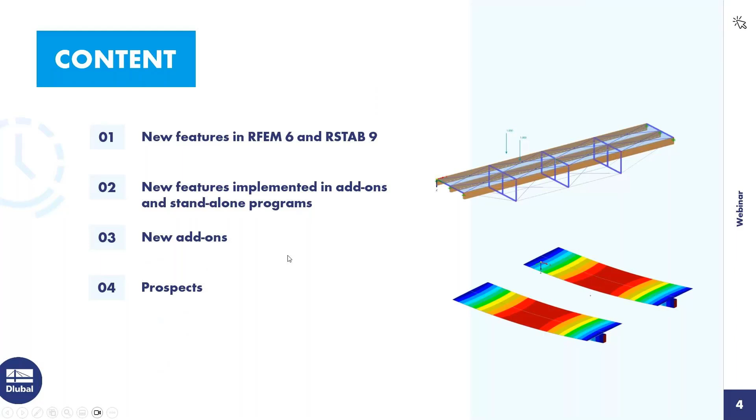For today's agenda: first we will present features in the main programs. That's a PowerPoint presentation, but we will also turn into the program and show some features directly in RFEM 6. Then we present the new features in the add-ons and standalone programs, present new add-ons, and as I already said, take a look into the future plannings for our developments.

Okay, let's start with the first features. The first feature is the console with Python option. You can also do in-app scripting with the Python language, additionally to JavaScript. Then you can implement visual objects in your model, maybe for a presentation, to show the dimensions of your model when you insert people or cars or something like that.

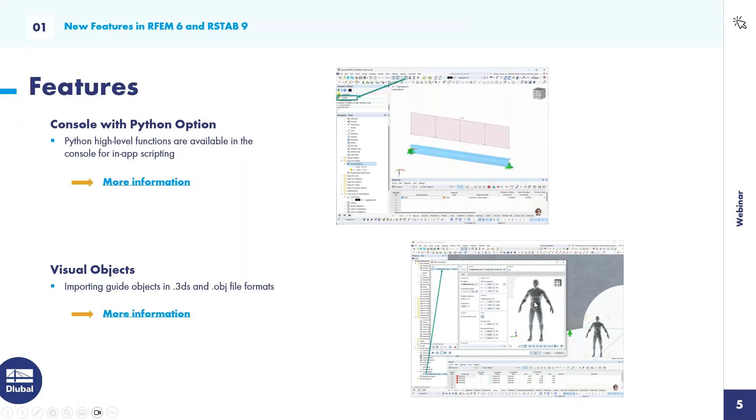The next feature is, in my eyes, quite important: the line hinges for rigid links. The absolutely biggest advantage is that you can model your elements in their actual position, for example for the connection of a ceiling joist. I will show that in the program, in combination with the interactive comment that you can hide if you want. You can create such internal or interactive comments with only a few clicks, and add additional information. I will show that in the program.

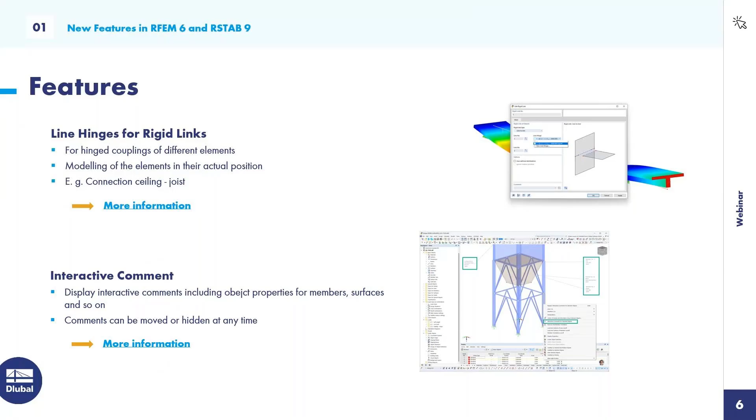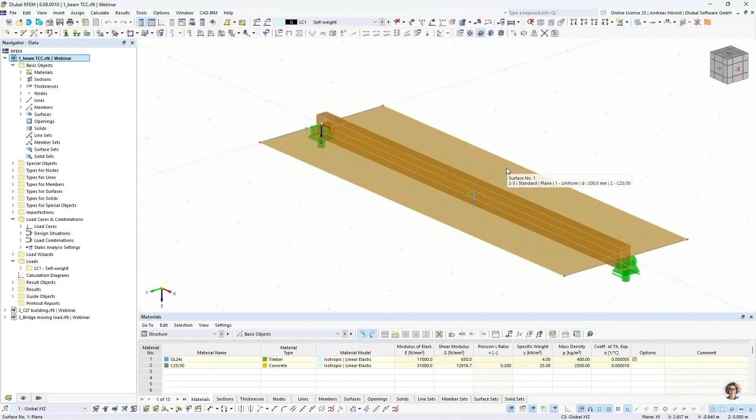That's the model that I have prepared. We would like to create a composite beam made of a timber beam and a concrete slab. But first, let me switch off the loads and create an interactive comment. I select the objects for which I would like to add an interactive comment, then right click, interactive comments for selected objects. Now you can see them here in the middle, but I can move them easily by drag and drop, so we can modify it a little bit.

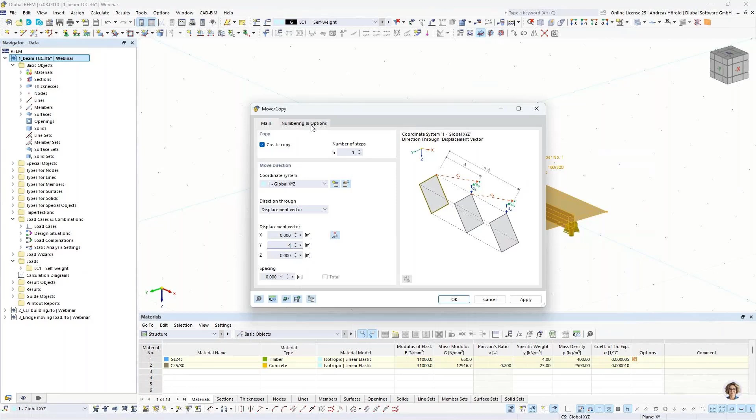I can also double click on such a comment and add several additional pieces of information, for example area. Now you can see the area of the concrete slab. Then let me copy that model: move copy, selected objects, copy 4 meters in Y direction and including loading.

In the first step, I would like to show you, when you switch in the navigator data, that function that is not new: line releases. We would like to create a composite beam with line releases, and in the second step, with the rigid links and line hinges.

Okay, then you can see the information of the beam and the slab. The beam has a height of 300 millimeters and the concrete slab 200 millimeters. Half of both is 25 centimeters, and we have to create a surface eccentricity of 25 centimeters.

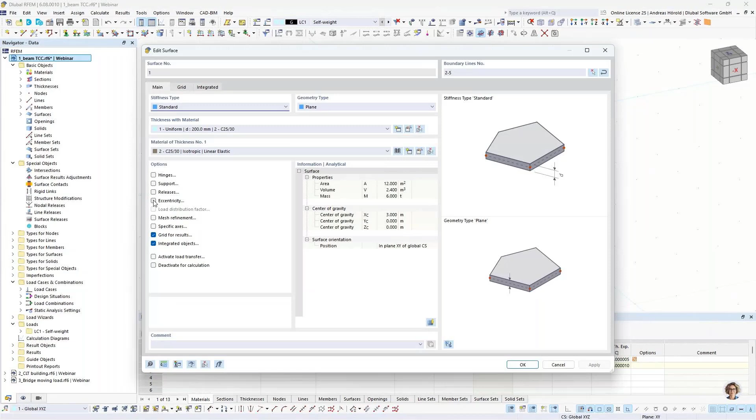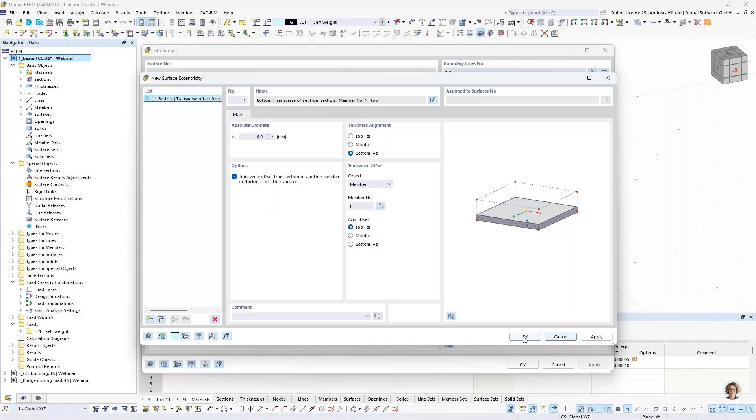Let me do that: double click on the surface, then select eccentricity, and I have to create a new surface eccentricity. We could enter 25 centimeters or 250 millimeters here, but I would like to show you another option, the automatic eccentricity. I would like to set the alignment: the bottom of the plate should be on the top of the beam. Which beam? That beam. And now the surface is moved automatically in that direction.

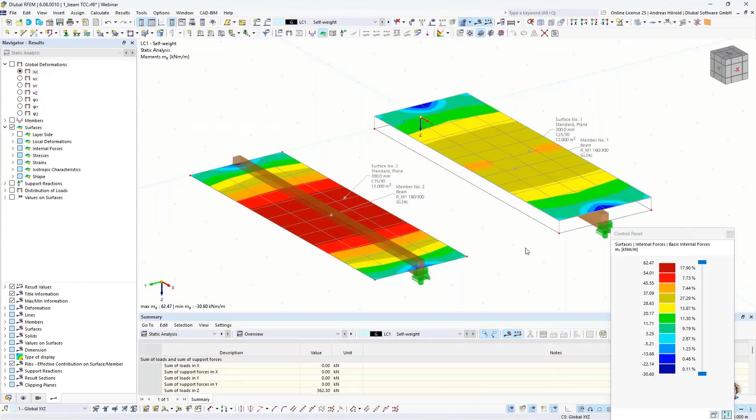Okay, all is connected, and when I calculate all, you can see the results. We now have a composite beam with a rigid connection. You can see that when I select global deformations, I have a much higher deformation on the left side than on the composite beam. In the second step, I would like to model that the concrete slab lies loosely on the top of the beam.

How to do that? As I already mentioned, we use the line releases. In the navigator data, I do a right click, new line release.

Which line? That's the center line of the beam. And the surface, that surface should be released. I have to create a line release type, so I enter a very small spring constant for the X direction, that's the direction of the line. And press OK.

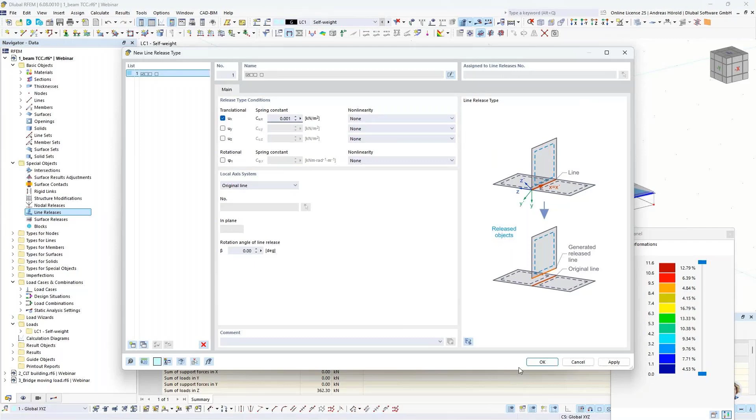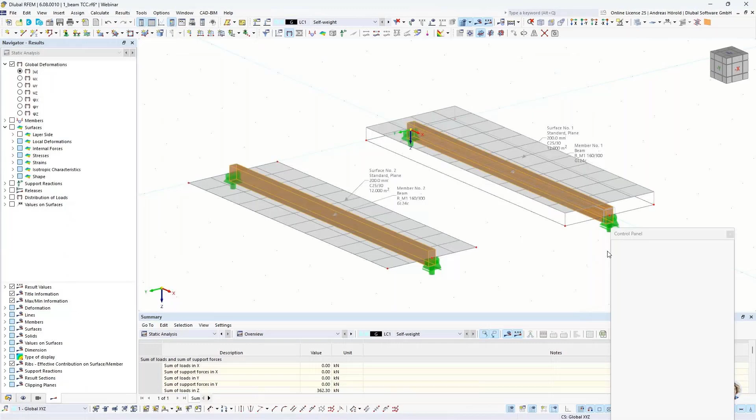Now the connection is not rigid anymore, but it's free. We can calculate and we should get the same information, the same deformation on both sides. Let's wait on the results. You can see 11.3 millimeters is the deformation for both models.

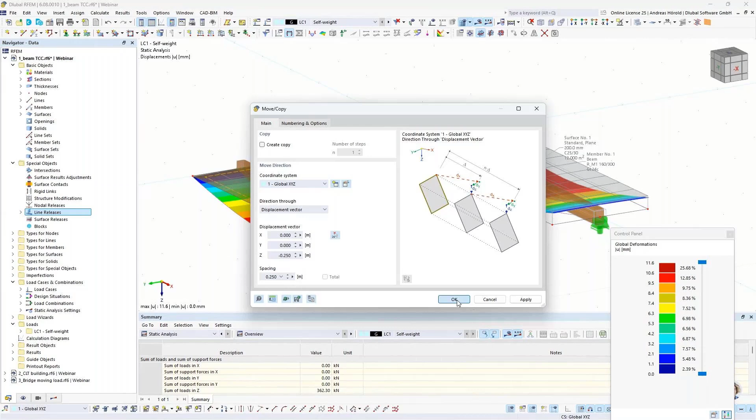So that's the version that you could create also before this year. And now we create, we use the option that's now available, the rigid links. So at first I move the surface to the actual place. I select it, then press move and copy, no copy, and minus 25 centimeters. Now the surface lies here and nothing is connected.

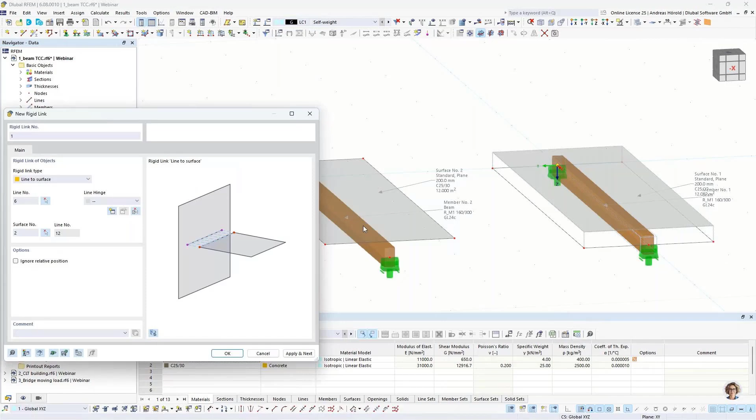But we create a connection now with a rigid link. With a right click in the navigator data, new rigid link. I select the rigid link type line to surface. I select the center line of the beam and the surface. And the line number 12 is created automatically in the surface. When we unselect that and press OK, then it would be a composite beam with a rigid connection between the two components.

Yeah, we skipped that step, and we create a new line hinge with the same spring constant in the X direction. OK. And when I calculate all, we will get the same deformation for both models.

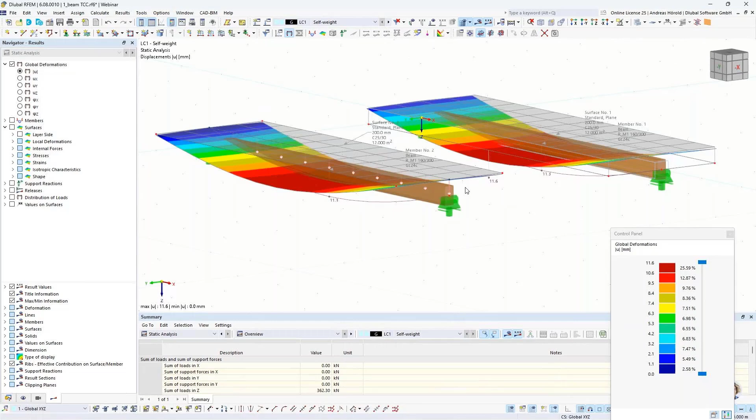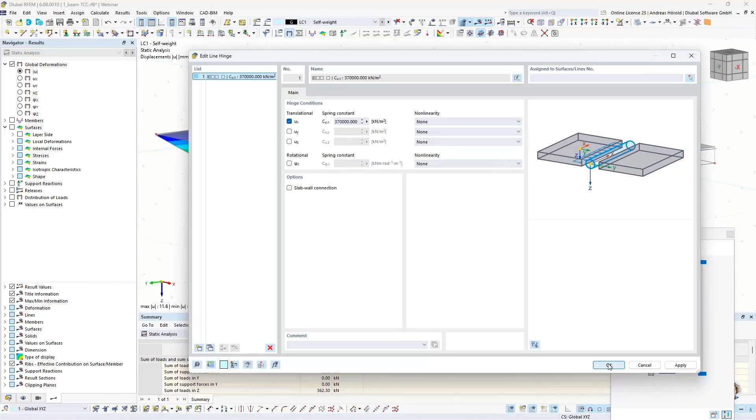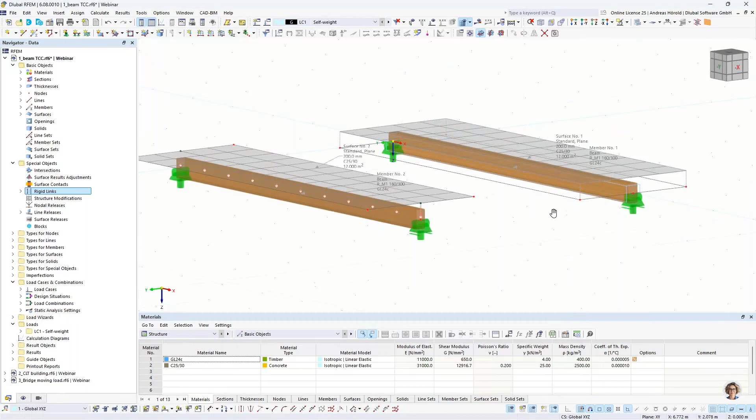Now the concrete slabs lie loosely on the timber beams. We enter in the last step the usual spring constant. I double click on the rigid link line hinge and enter a value that's more typical for a TCC screw, 370,000. We have to do the same for the line release, 370,000. And we should get the same deformation for both components, or both models.

7.6 millimeters. As I already said, the big advantage of that model on the left side is that you can model all components in the exact place where they are in reality. OK, that's all for that model and these features.

Then you can now generate surfaces from member with section cross sections, when you would like to intersect or generate surfaces from such a section cross section, for example for stability analysis or connection design or something like that. You can do that now.

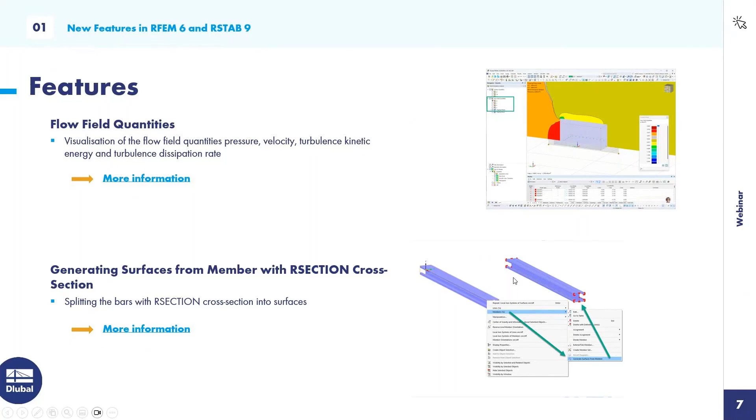You can display the finite strip method results with a 3D graphic.

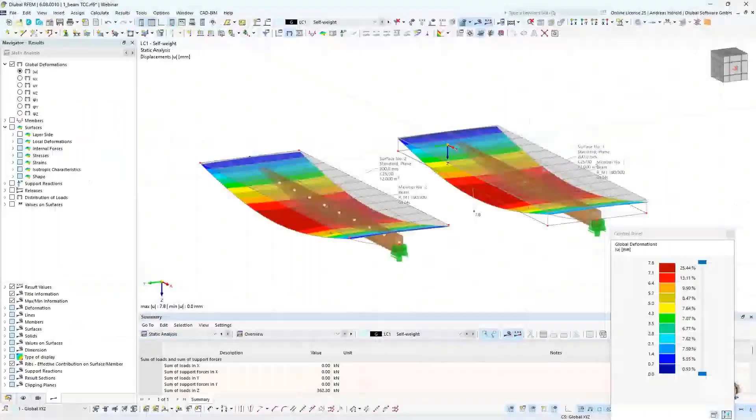Then, also an often wished feature, the independent FE mesh. I would like to show that in the program so you can understand it very well. So, that's a CLT building. It stands on top of a slab, a floor slab made of concrete, and the slab lies on soil solid. So let me go to the FE mesh settings.

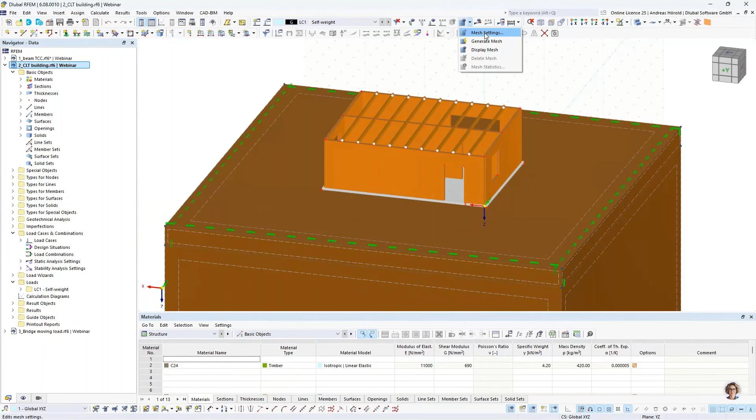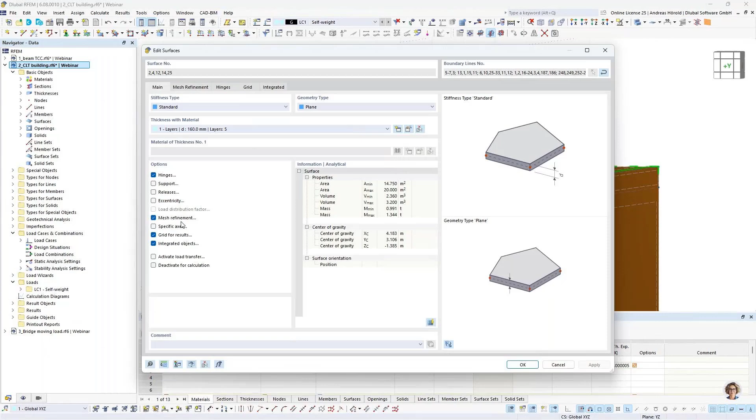We can leave the standard value of 50 centimeters for the FE mesh elements. For solids, we changed that to 1 meter. And I would like to have an FE mesh with a size of 25 centimeters for the CLT slabs. So I select all, then I create a mesh refinement, new mesh refinement, 25 centimeters. So let's create the FE mesh. Sorry, so display mesh, OK.

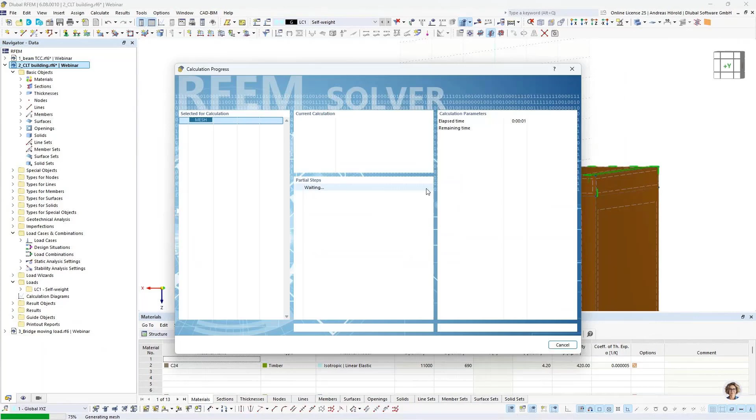And you can see in the concrete slab, the FE mesh, it's not regular. All FE nodes are connected to the neighbor element.

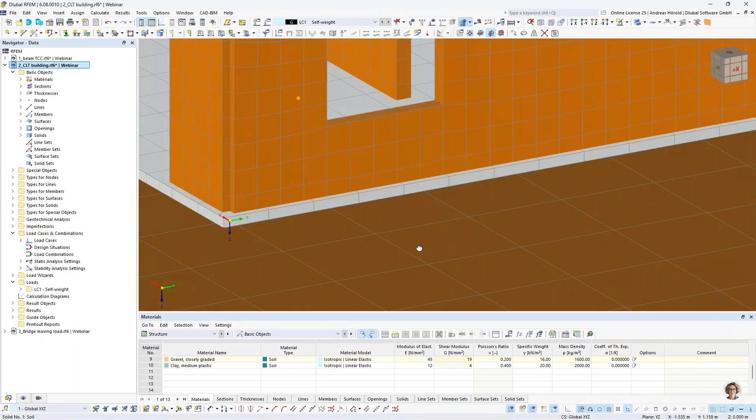So when we go back to the mesh settings, you can now select the independent mesh. OK, and apply, and you will see the difference. So it's much better now. As you can see, the finite elements do not have to touch at a common node, and the finite elements of integrated objects are connected to the integrating one. Quite a good option for FE calculations with different FE mesh settings of the elements.

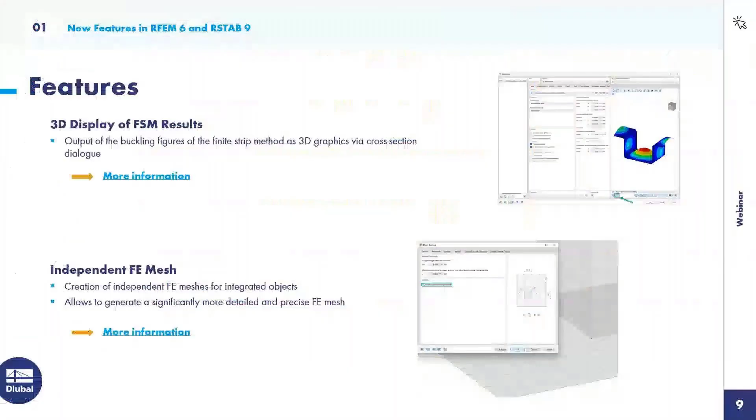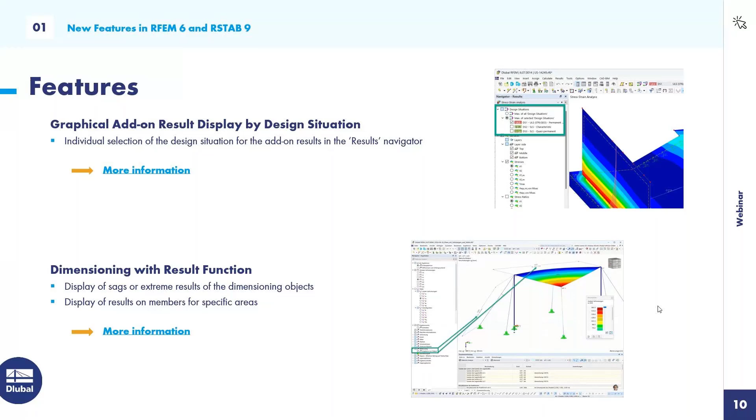The next feature is the spline surface with minimal curvature. It's very helpful for generating curved surfaces based on control nodes in the middle of the surface. It's especially useful for modeling terrain surfaces or other complex curved geometries.

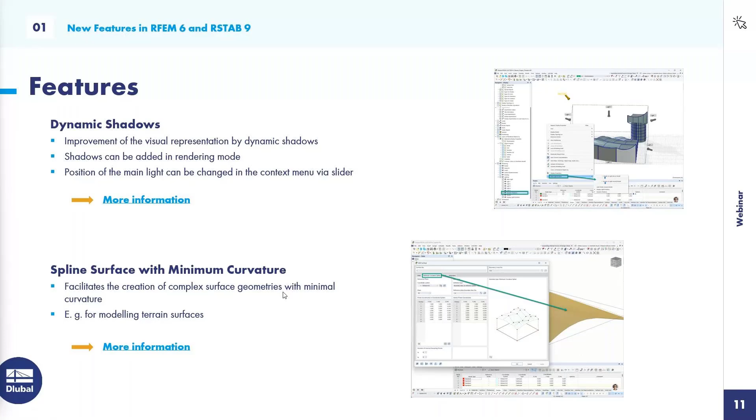Next, I'd like to introduce you to our AI assistant, Mia. The AI was trained with the help of our website and ChatGPT and was honored with the Construction Computing Award 2024. I'd now like to show you Mia in the program, but she's also available on the Dlubal website.

Now I switch to RFEM. As you can see, you have this little button in the corner, and when you click, there is the AI assistant, and she can answer questions about products, add-ons, as well as licensing, but also technical questions and questions about support and training.

For example, we can ask her, how do line releases work in RFEM6? And then Mia gives you a definition and a step-by-step guide how this works in RFEM.

And she also links articles on the Dlubal website. If you want to follow the link, you have to press the control button, and then you can see the article on our website. For example, here is the knowledge base article for the line releases in RFEM 6.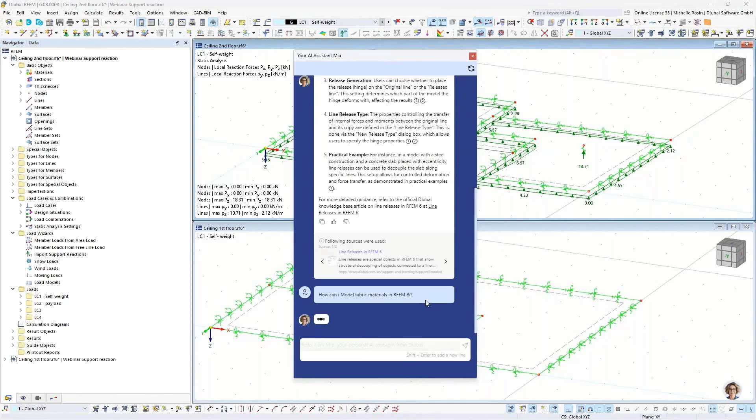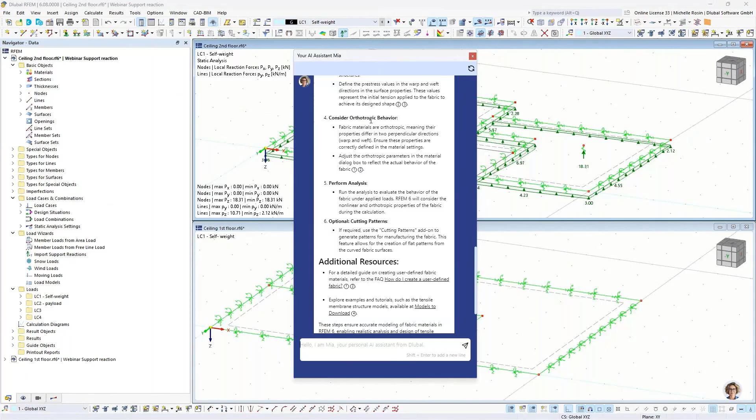We can ask her another question, and it's the same procedure. When she's ready, you can also see that she marked the sources on every step she made, and you can see the sources at the end of Mia's text.

So I go back to the PowerPoint presentation and continue with the next feature, which is a new member type. The damper is now available. Its member type is similar to the Kelvin-Voigt model, which consists of a damping element and an elastic spring connected in parallel. This member type can be used for models that should be analyzed dynamically.

The next feature is creating surface cells due to openings. It helps to generate lines created by openings in surfaces and thus saves time during modeling. This is very useful for the construction of timber panel walls, as the lines for the columns can be generated automatically.

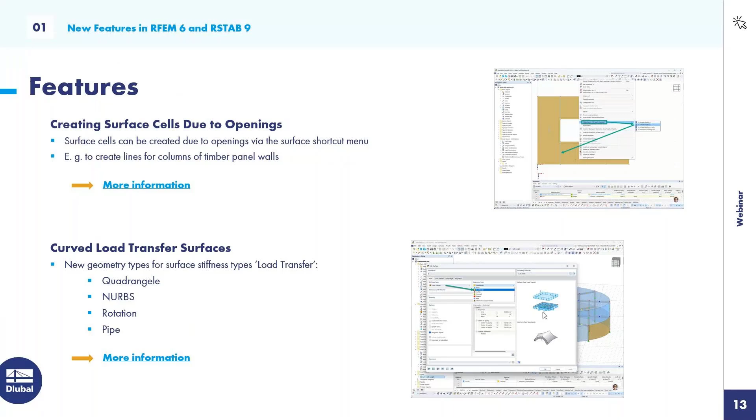The load transfer surfaces was an often requested feature for RFEM6. That means the surfaces are only used for load transfer and have no stiffnesses. Now there are also curved geometries available.

The next feature is the diagram evaluation for surface result points. This feature is useful for analyzing specific points on surfaces and analyzing the results in a graphical form.

Furthermore, another frequently requested feature is available now: displaying design results in a table by design situation. As you can see here in the picture, this enables a more detailed evaluation of the results.

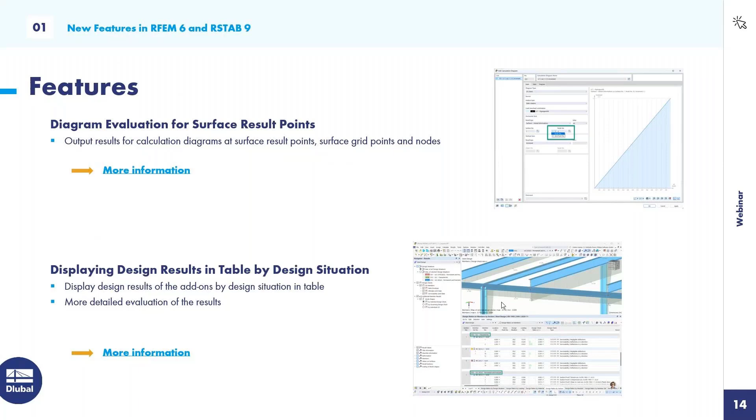The next feature is design check details on mesh node selection in the graphics. It's very helpful for obtaining detailed results for specific mesh nodes in the graphic, and as you can see here, you can also select the nodes directly in the graphic.

Another feature I'd like to show you in the program is the transfer of support reactions to free loads. So I switch to RFEM again. The support reaction transfer function enables the efficient and error-free transfer of loads.

The support forces of the connected models are applied as free loads in this scenario, and this saves time because you don't need to assign the loads manually. As you can see in the upper model, we have two ceilings here in the first floor and the second floor, and you can see the support reactions here.

The question is how we can transfer the loads from the upper floor to the first floor. We can do this by clicking in the model below, and we have the load wizard, called import support reactions.

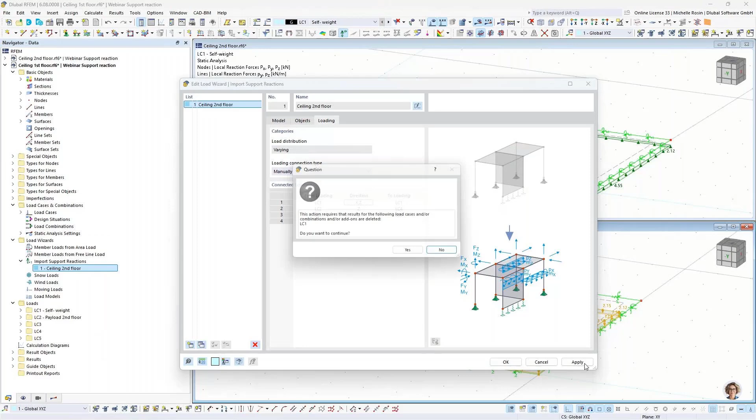Now there is a question: what happens when we change something in the upper model? For example, when we add loads in the X direction or something. So we can go back to the load wizards and click on this again, and add another direction, apply. Then it tells me that the results will be deleted. Click yes, and we can start the calculation again.

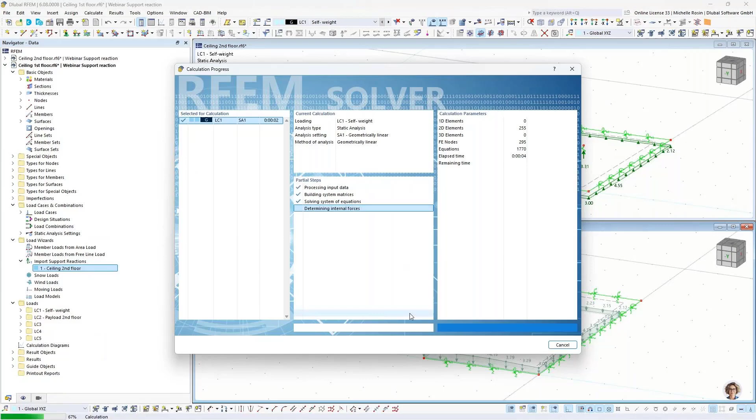Okay, so we don't have any loads in the X direction here, but you can see that always two directions are considered.

It's also possible to disconnect the models afterwards. So you right click on the import support reactions, then you can disconnect generated loads and disconnect dependent model. Yes, and the loads are still here. You can see that the forces are black now, and these ones are red because there are no forces.

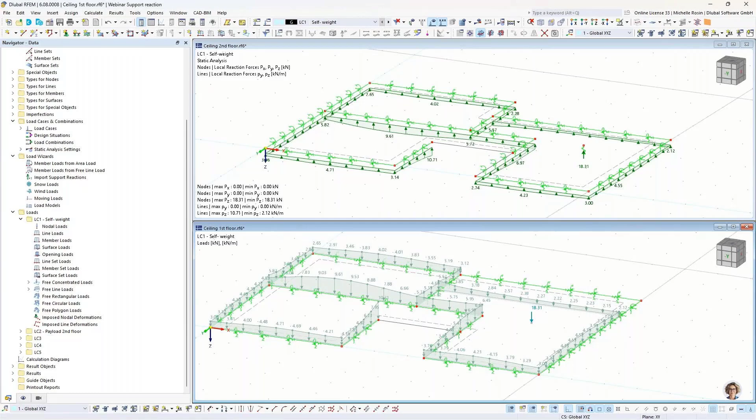Yes. And that's it for this feature. I'm switching back to my PowerPoint presentation, and I'm continuing with the next feature.

It's the final result combination via auxiliary combinations. This is very useful for creating clearer and easier to check result combinations for models with many loads or with many load cases, for example, moving loads on bridges.

And the next feature is the combined PDF report. It allows the various printout reports to be exported in a single PDF file, which makes the documentation of larger projects clearer and easier. And now I'd like to hand over to Andreas again, who will introduce you to further features.

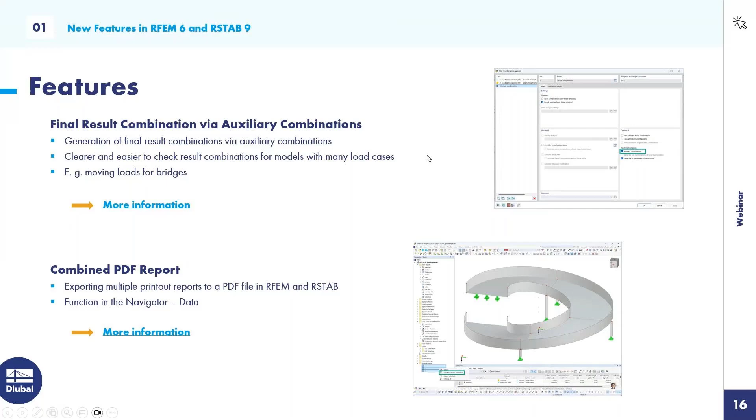Okay, I continue. You can now exclude objects from design by combination. That allows you to design certain objects only with certain load combinations.

Then join line or join member. Imagine you have two members and you would like to create one member from it - that's what that feature is for. Just select them and use that function, and you will join the members, and then there's only a node in the middle. In that example here, node on member.

Okay, then you can import and export Python scripts. Then a quite important new feature is the load wizard for moving loads. It's directly integrated in the program. In RFEM 5, you had to buy an add-on, but that's not necessary in RFEM 6 - it's directly integrated. And I would like to show that feature in the program again.

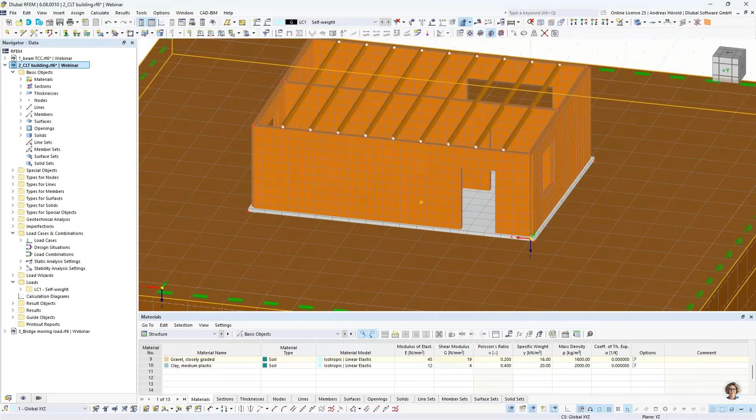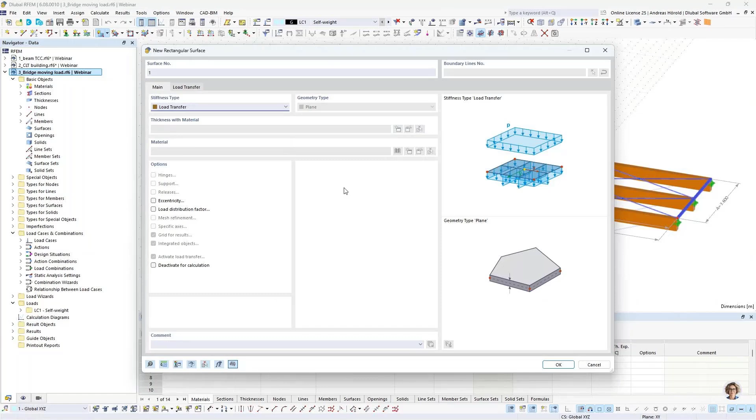So I prepared that bridge, and we would like to create a moving load. At first, that's a model only made of members, and we have to create a surface. So left above, new rectangular surface, and I would like to create a load transfer surface without any stiffness, so we use that only for distributing the load. We would like to distribute the load in that direction from timber beam to timber beam.

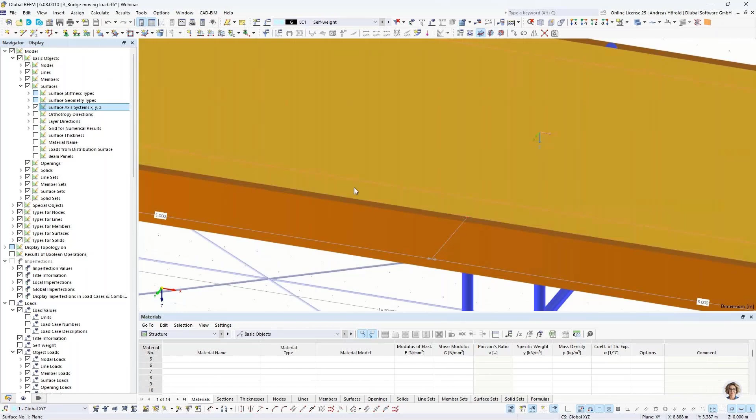Let me switch to the navigator display, to the surfaces and surface axis system. So, you can see in that direction, in Y direction, we would like to distribute the load. Okay, I double click on the surface, go to load transfer, and I select for the load transfer direction Y stripes. Okay.

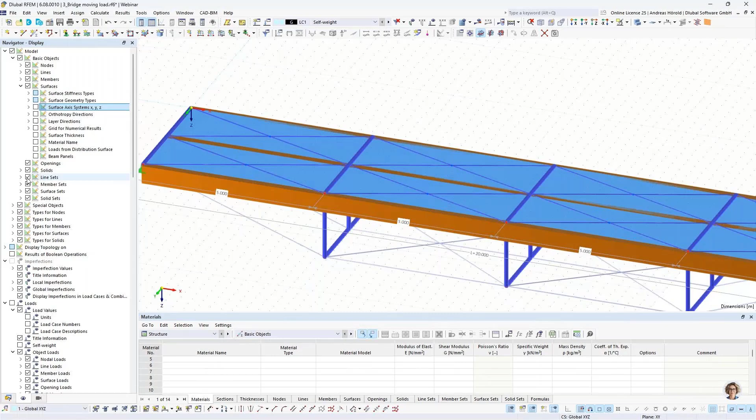So then let me display only the lines. I deselect the members. Okay, and I switch to the wireframe model, and you can see only the lines. And I would like to show you for the lines, the line axis systems.

On that middle line in X direction, I would like to create a moving load, but not on that line, but next to the line, on the left side and the right side. Now imagine a pair, two people would like to move over the bridge.

So I go to Insert, then Load Wizards, Moving Load Wizard. So at first I have to select the surface - that's the load transfer surface.

And I have to create a line set, because the moving load will move not only over one line or along one line, but along all 4 lines here. Okay.

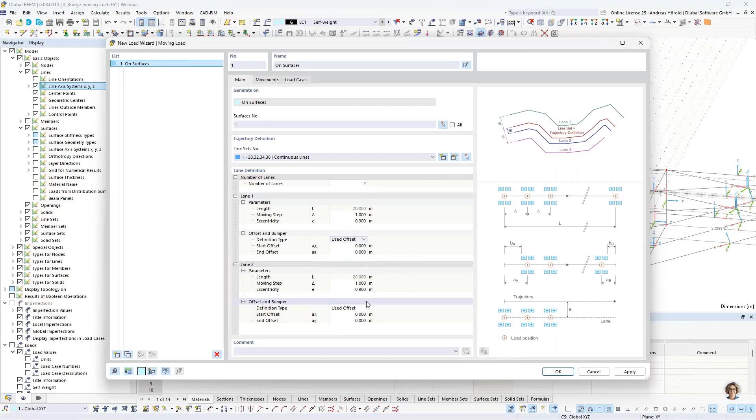So then I create 2 lanes. Yeah, and you can select more than 2 lanes, but for my easy example, it's sufficient. So the eccentricity of lane 1 is 90 centimeters, and for lane 2 as well, minus 90 centimeters. Yeah, you can also create an offset or a bumper - not in that example, but when you would like to use it, you can do it.

Then we have to create the lane definition, lane 1, and we have to create a new load model.

So number of components, in our case 1, but as you can see in the preview image, you can use more than 1 components. Then load type, force or moment—we use force in Z direction, but you can apply the load in different directions.

The type of load, there are a lot of loads available, for example free rectangular loads—imagine a tire of a car or something like that. We use the free concentrated load, and we select the main load of 1 kilonewton.

We can select the load factor and a distance from previous load and so on, but in our easy example we don't do that. So those are the 2 loads on the 2 lanes.

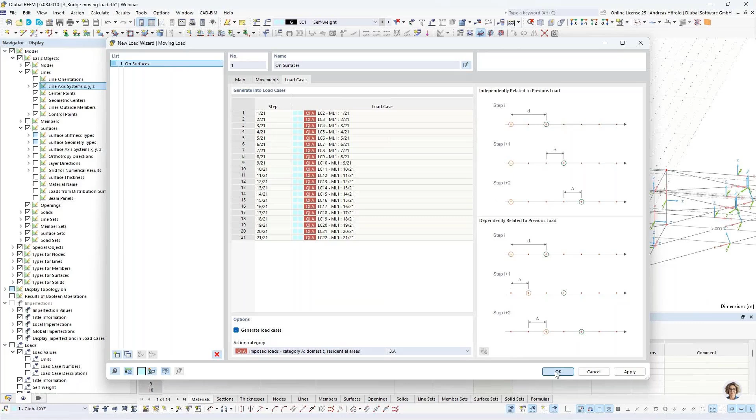Okay, and now we let the load move over the bridge. I deselect the line axis system, then I switch on the members. So now those are this. I increase the load a little bit.

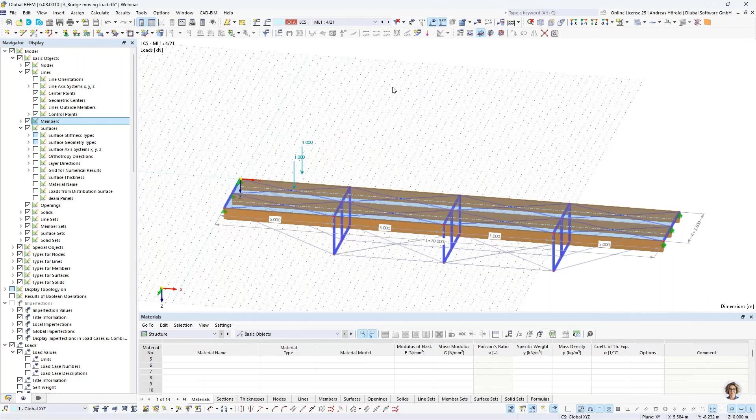And we move the load over the bridge, or the 2 loads. A nice tool for moving loads, for traffic loads, and so on. And it's for free in RFEM 6.

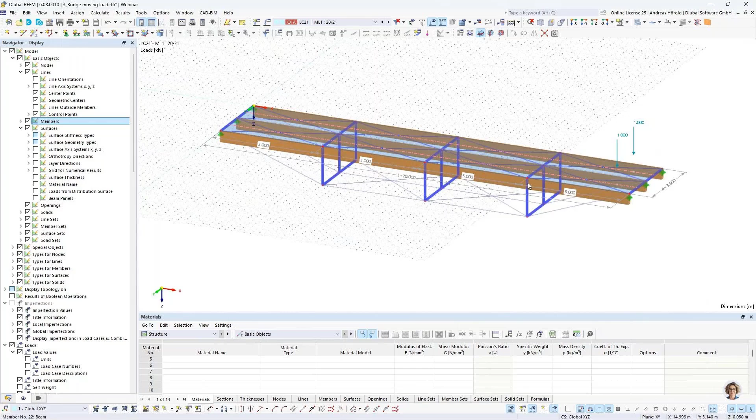Then we integrated new interfaces to BricsCAD, SDNF, or the DXF-II import and export. With that interface, you can, for example, export deformed FE mesh and other things.

Then a new feature is the hinge diagram. You can use that for pushover analysis.

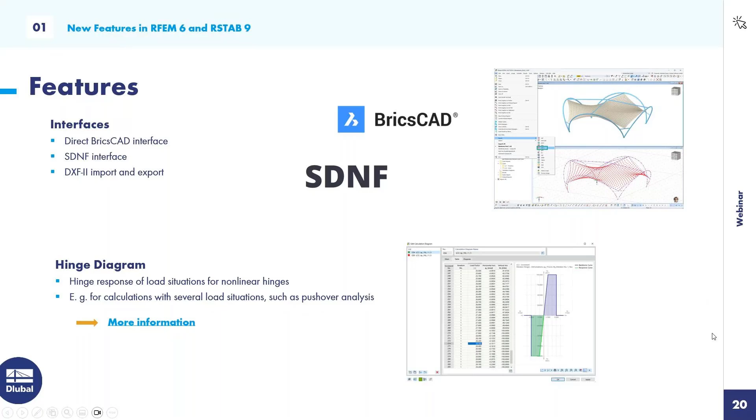Then in the timber design add-on, we have implemented the fire resistance design of surfaces for the Eurocode 5, the standard of Switzerland, USA, and Canada. And you can also display a charring diagram.

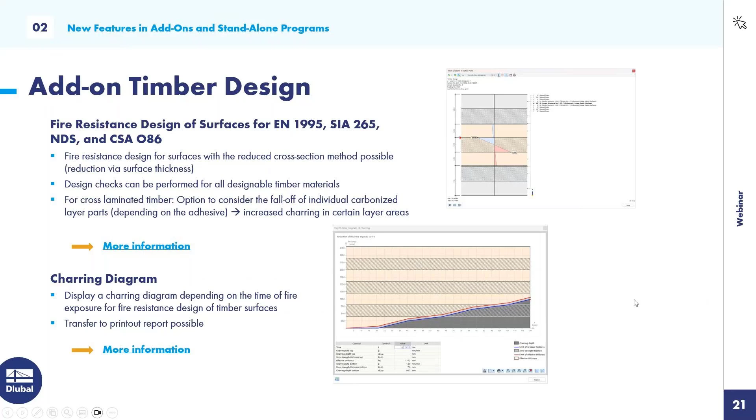A new element is the timber panel element. It's a 3D element that you can create easily. You can consider single-sided or double-sided sheeting. It's not only for timber panels—the name is beam panel, and you can also use it for other materials such as particle board, gypsum, fiberboards, and so on, but usually you would like to use it for timber panel elements.

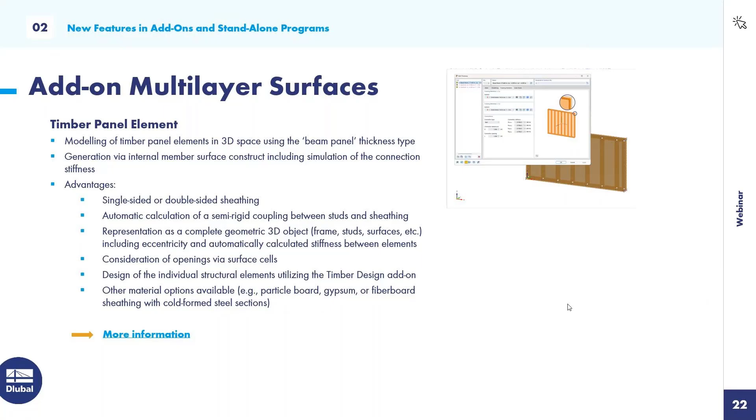Thank you. I'm now continuing with the features for the concrete design add-on. The first is the punching shear reinforcement feature, which allows you to define an existing vertically aligned punching shear reinforcement. This is considered in the punching shear check afterwards.

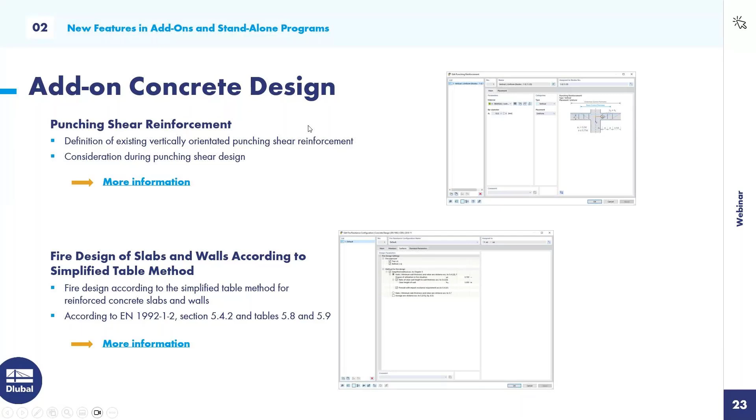In addition, the fire design using the simplified table method is available for reinforced concrete slabs and walls. It's also now possible to display the reinforcement results in tables by the specific design situations.

The feature determination of the required longitudinal reinforcement for direct crack analysis enables the accurate determination of the longitudinal reinforcement for compliance with the crack width limitation.

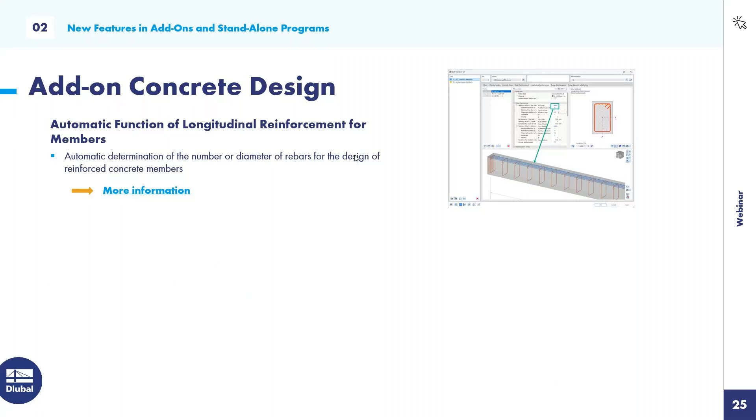And also the automatic function of the longitudinal reinforcement for members is very helpful to automatically determine either the number of the bars or the bar diameter for the longitudinal reinforcement. This makes the design of the reinforced concrete members easier and also saves a lot of time.

The next features I'll introduce to you relate to the geotechnical analysis add-on. Let's start with the Hoek-Brown material model, which enables the realistic modeling of material behavior through a linear elastic ideal plastic model with a non-linear strength criteria developed specifically for rocks.

Also, a new member type is available: the pile. Here, resistance values such as skin friction and tip pressure are taken into account in order to embed the piles realistically in the soil volume and calculate settlements and soil pressure precisely.

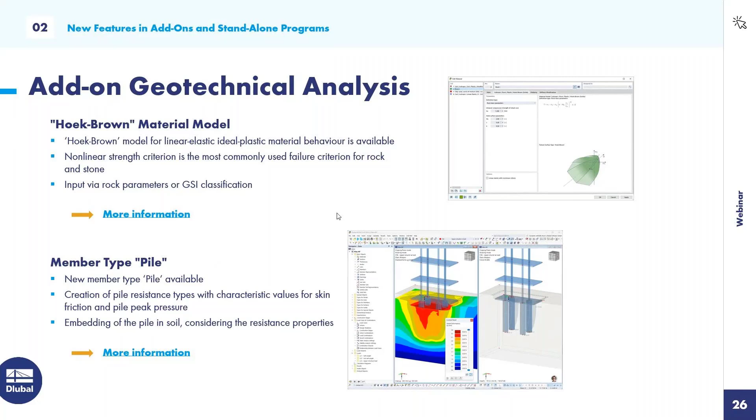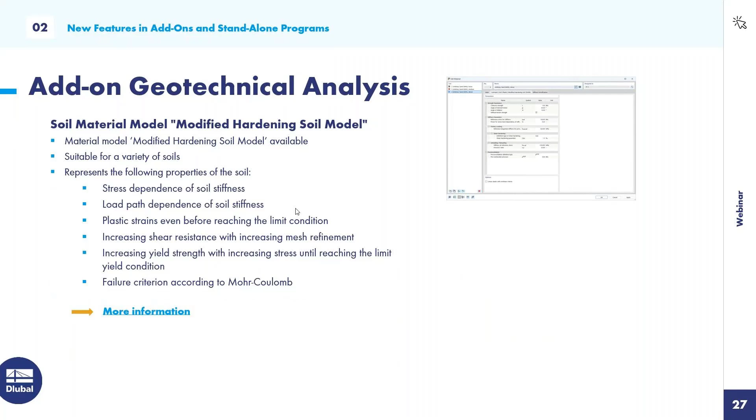The soil material model, the modified hardening soil model, is also available now. It maps the realistic properties of soils such as stress and load path dependency, plastic strains, and the increase in shear strength and yield strength. This enables a more precise geotechnical analysis and optimized plannings of structures in the ground.

Now we continue with the features for the add-on building model. The first is the neglecting openings feature, which allows openings with a smaller area, which don't have a significant influence on the load-bearing behavior, to be ignored in the building model calculation. This simplifies the model and reduces the calculation time.

The next feature is the shear walls and deep beams consisting of members. It's used to efficiently model vertical surfaces such as shear walls and opening lintels. But now you can also allow the assignment of members when generating shear walls and deep beams.

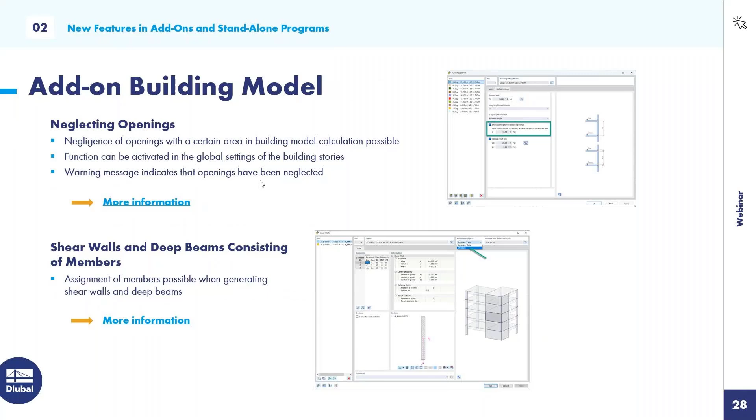The next is the semi-rigid diaphragm for modeling stories feature. It allows you to realistically consider the flexibility of floor slabs. In addition, design properties for shear walls and deep beams can now be defined for the respective add-ons.

The last feature in the building model add-on is the calculation of the center of gravity, considering the loads of load cases and load combinations. It offers the option of displaying the center of gravity of a building model in the result table. A new aspect here is that not only the self-weight, but also the vertical loads of the respective load cases and load combinations are taken into account for the calculation.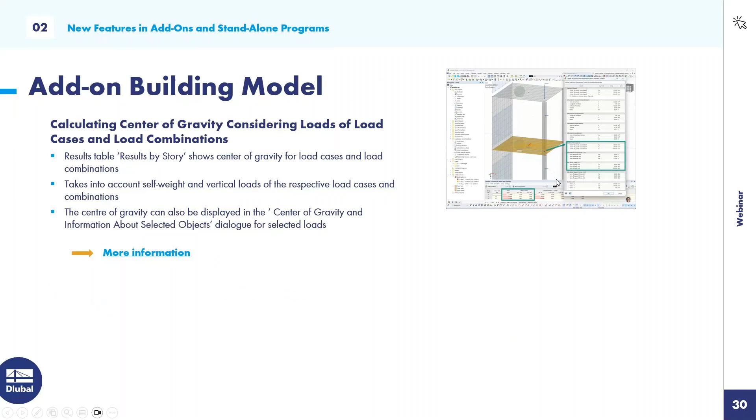The next add-on is the stress strain calculation add-on. It includes a new feature for specifying a component-dependent limit stress cycle. It allows the definition of different limit stresses, which are then considered in the design. This improves the accuracy and flexibility of the stress calculation.

The second feature here is the sign-dependent stress verification. This sign can now be defined for each component, and it ensures that the stress checks are treated differently depending on the positive or negative sign of the stress.

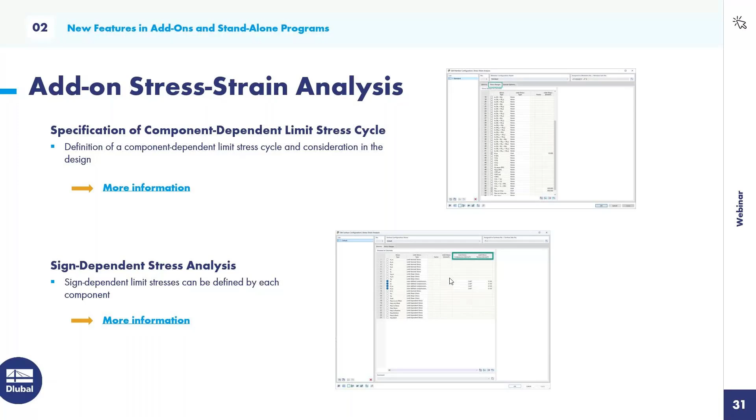There are also two new features for the construction stages analysis add-on. The first is the phase sections feature, which allows the use of composite cross sections that can be activated or deactivated gradually across different construction stages. This is useful for realistic simulation of construction processes in which the geometry or load-bearing capacity of a cross-section can change over time, for example because individual components of structural elements are created at different times.

The second feature in this add-on is the flow graphs for construction stages. It enables the realistic representation and analysis of construction processes using flowcharts, as you can see here in the picture.

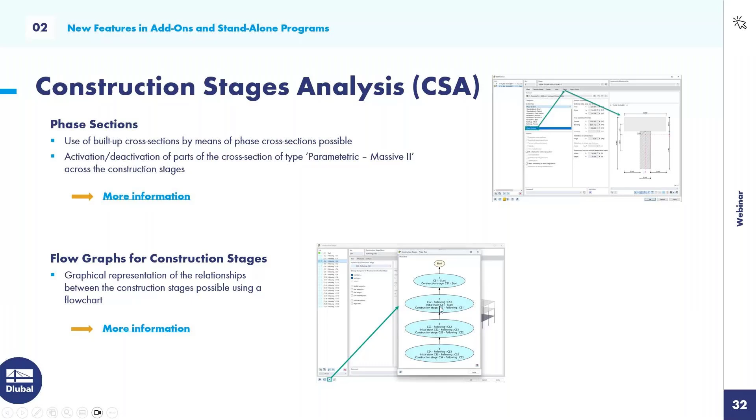There's also a new feature for the time history analysis add-on: the consideration of initial conditions for the time history analysis. This makes it possible to include initial conditions such as pre-stress, form finding, or strain in the time history analysis. This allows load cases to be realistically modeled on the basis of form finding analysis or other initial conditions, and dynamic and seismic analysis to be carried out more precisely.

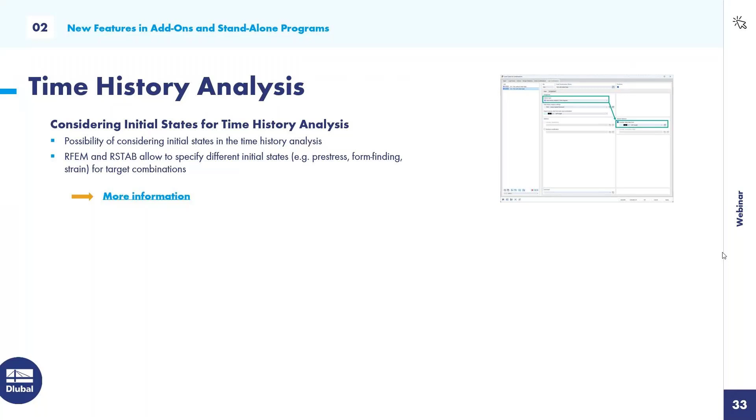For the aluminum design add-on, there's also a new feature available: the softening due to transverse welds in the heat affected zone. It enables the consideration of strength reduction in weld seams due to transverse seam effects.

The next feature, nonlinear material behavior in the form finding add-on, enables the simulation of complex behaviors of pre-stressed tissue membranes using a representative microstructure volume element, the RVE model. The tissue geometry is included at the microstructure level to perform realistic analysis of tissue materials.

And now I hand over to my colleague Andreas again, and he will go on with the features for the steel joints add-on.

Okay, I continue with the features of the steel joints add-on. There's the component rib. You can easily add one or more ribs in your connection or joint, for example also for circular hollow sections around the section, two or more, for example ten ribs around the hollow section. Then you can modify the plastic limit strains for weld.

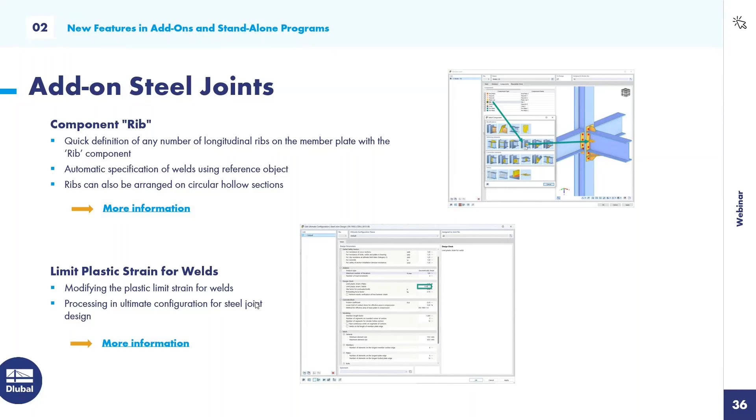That's also possible for the limit plastic strain for the plates. You can change that factor or value if you want to be more on the safe side or something like that.

Then there's a new important component, the base plate for foundation block connections, and it analyzes the plates, welds, anchorage, and also the steel concrete connection. So then you can do the steel design for result beam members and surface models. This is now also possible.

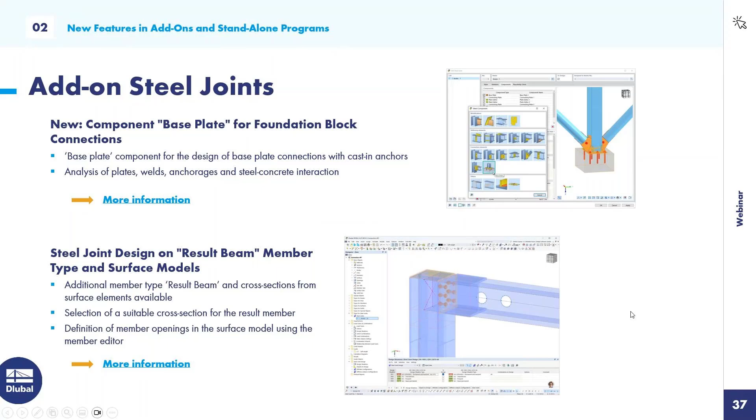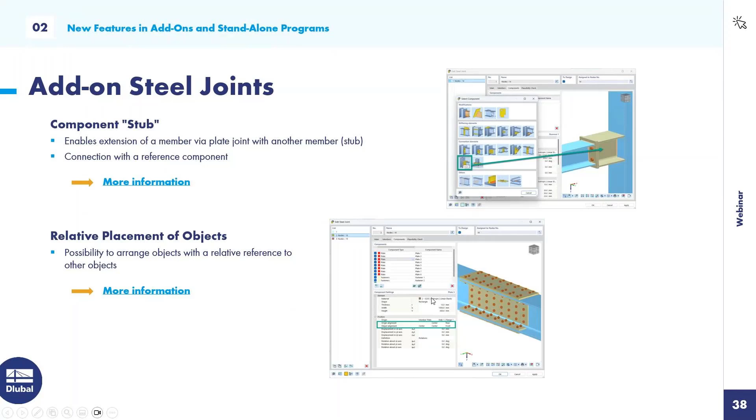Then you can use the new component, the stub. You can create, for example, such a stub, and it's not considered in the global model, but you can use it for your joint. You can place objects relative to other objects. It's now more flexible.

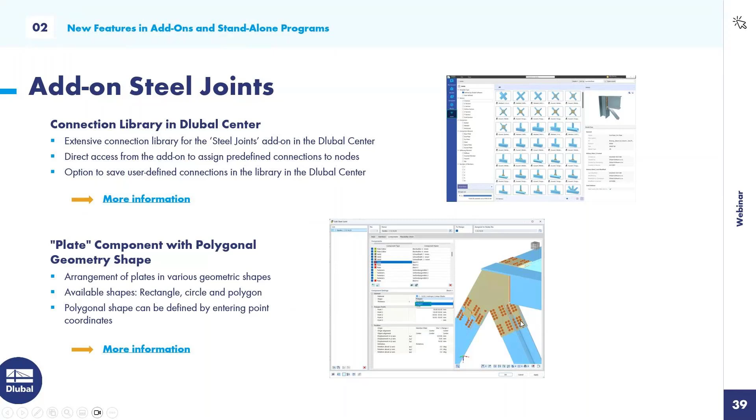The connections now are in the Dlubal Center. You can create your own connections and save your user-defined connections in the Dlubal Center. That's also a component that makes creating connections very flexible. You can use polygonal geometries for your plates, as you can see in the preview image, for example.

Then there's a new component, the surface contact. Imagine you have two beams, one lying on top of the other. Then you can use that component, and you can also consider friction between the components.

Then a really important feature is the joint structure interaction. If you use that feature, the program generates hinges in the global model and considers these hinges in subsequent calculations. Now you can create your model as it is, with connections and with the hinges that are in the connection.

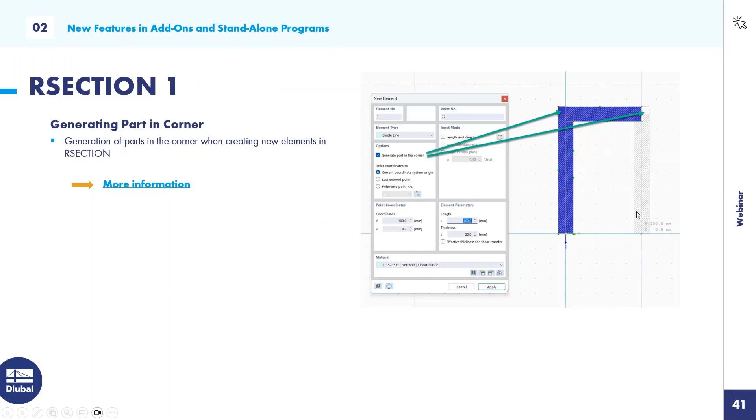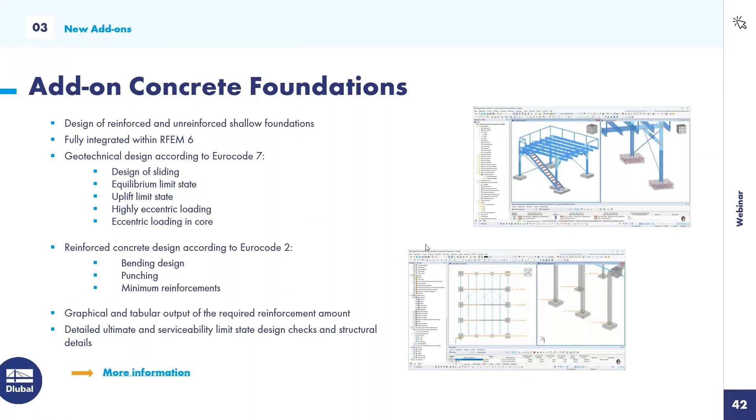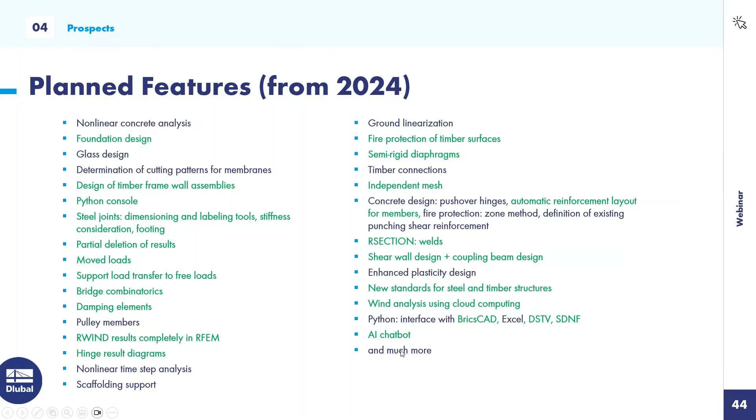Then we turn to the last point of today's webinar, our planned features. Those are the planned features that we introduced you beginning this year. What is green? Those are the features that we implemented. I showed the independent mesh, the foundation design was mentioned, we showed the moved loads, the support load transfer to free loads, and the AI chatbot.

So that's the plan from now on, what we would like to implement in the program and in the add-ons. We would like to complete the nonlinear concrete analysis. Also, the completion of the foundation design is planned, for example, block foundations, bucket foundations, and international standards. Then we will release the glass design add-on. You can design laminated glass, insulating glass, and design that with international standards and also without standards.

Then the determination of cutting patterns for membranes, where auto cutting is implemented, and the add-on does much of the work for you. Then cable pulley members—we had that type of member in RFEM 5, and now we will implement it in RFEM 6. Then the nonlinear time step analysis, the extension of the time history analysis add-on.